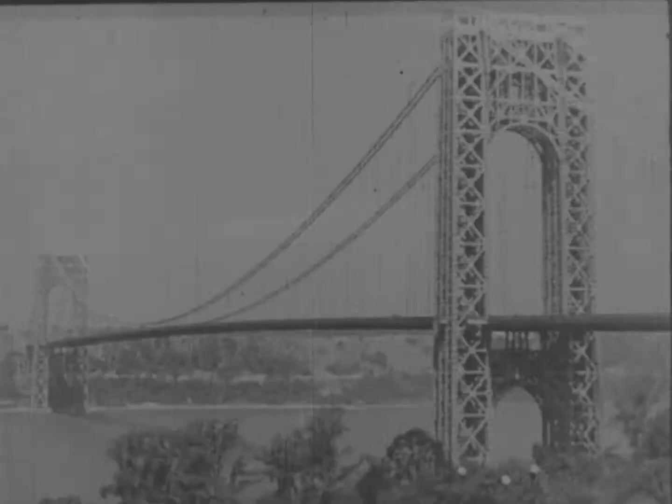New York and New Jersey created a joint agency, the Port of New York Authority. As a result of cooperation between states, a great bridge now spans the wide river, the George Washington Bridge. And beneath the river lies the Holland Tunnel, the busiest highway in the world. To date, more than 100 million cars have driven through it.

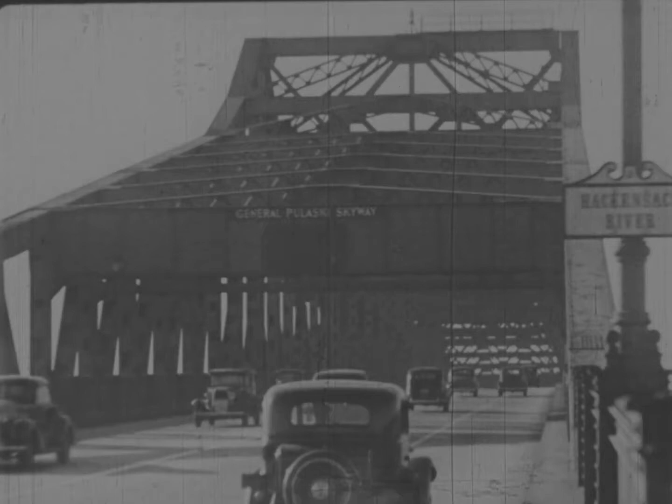Still a mounting tide of traffic seeks a river crossing. Down Manhattan's west side, over New Jersey's Skyway. A tremendous stream of passenger cars, trucks, and buses demands a fast route from shore to shore.

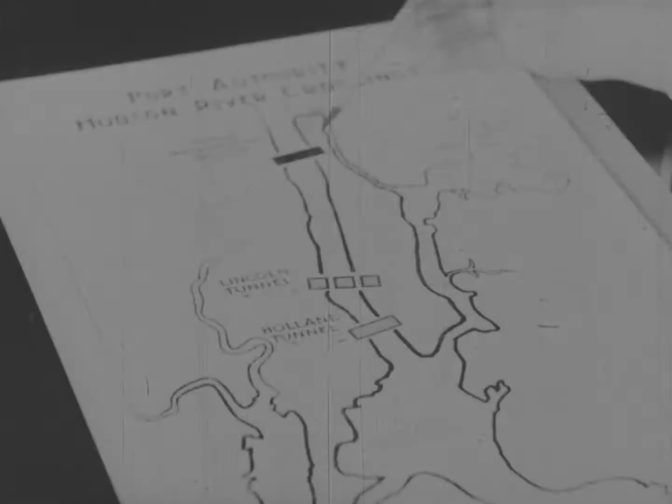Port Authority engineers study traffic trends. Facilities will soon be overcrowded. Another crossing is needed. To serve the congested Midtown area, the Lincoln Tunnel is located between the George Washington Bridge and the Holland Tunnel.

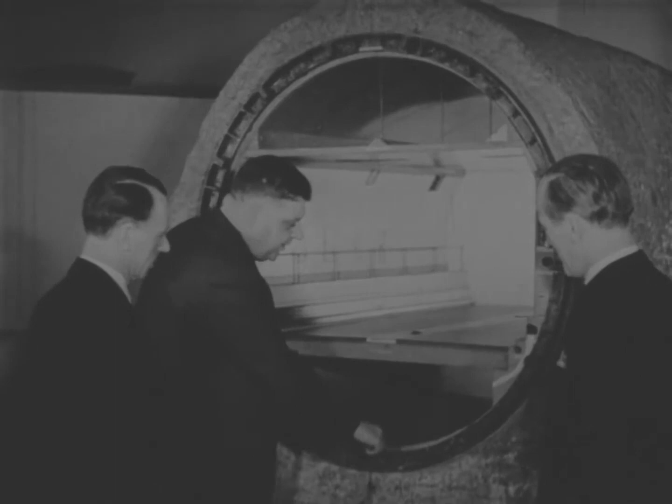To keep the river clear for shipping, it was decided to build a tunnel rather than a bridge, nearly 100 feet below the surface of the river, similar in design to the Holland Tunnel. Its outer wall is a huge cast iron pipe, 31 feet in diameter, and through it a roadway is constructed.

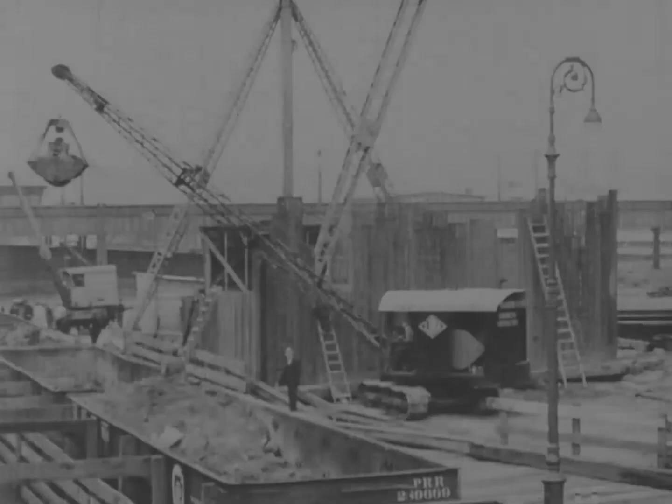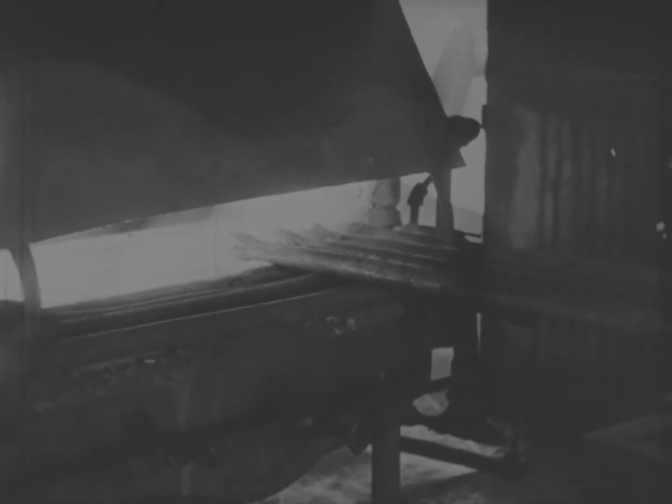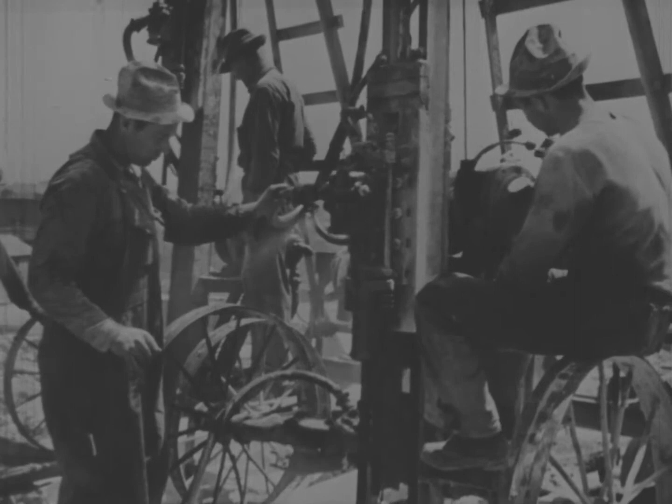And so the Lincoln Tunnel is started. Derricks and steam shovels get underway. Surveyors chart the course. Drills are forged. They must be sharp at all times, for it is necessary to drill through solid rock. Powerful air compressors are installed. To counteract the weight of water and silt, all tunneling is done in compressed air chambers.

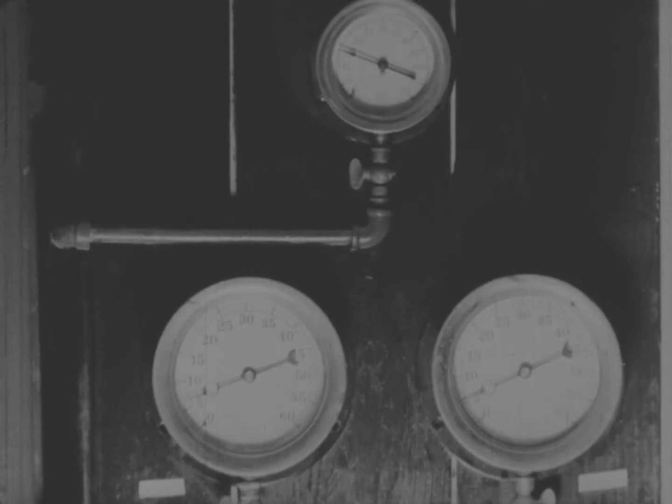He is holding his nose and blowing through his mouth to open up the passage leading from throat to ear, thereby equalizing the air pressure against his eardrums. This man, who has now passed his test, is called a sandhog and receives the compressed air worker's badge, which he will wear at all times.

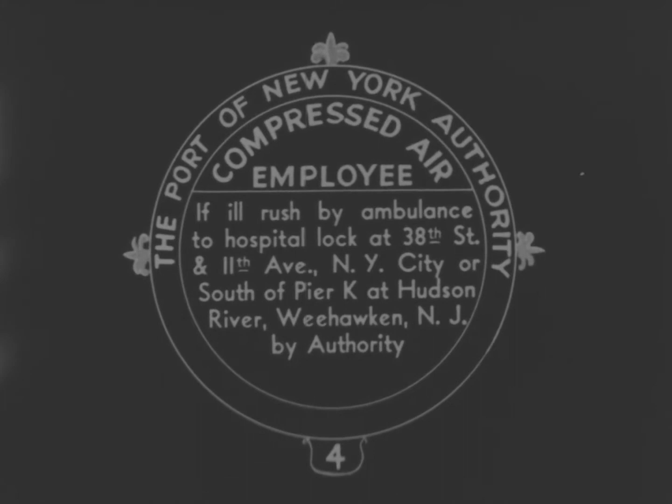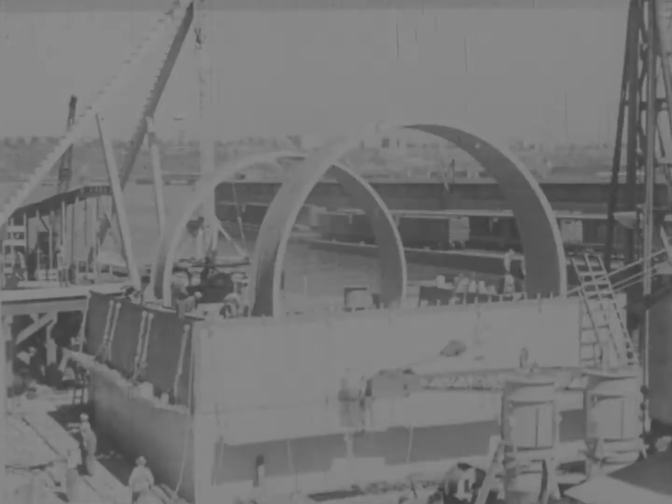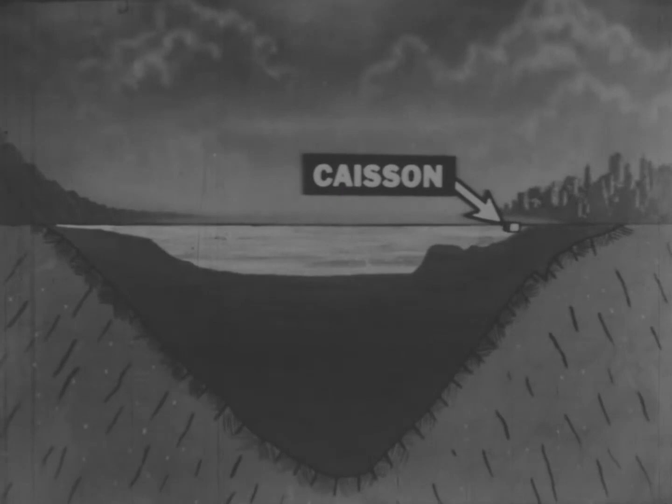A caisson, or huge steel box, has been fabricated in a shipyard, launched, towed up the river, and anchored ready for sinking. Muck is dug out until the caisson settles on bedrock to which it is sealed. The caisson is the target toward which two tunnel crews will aim.

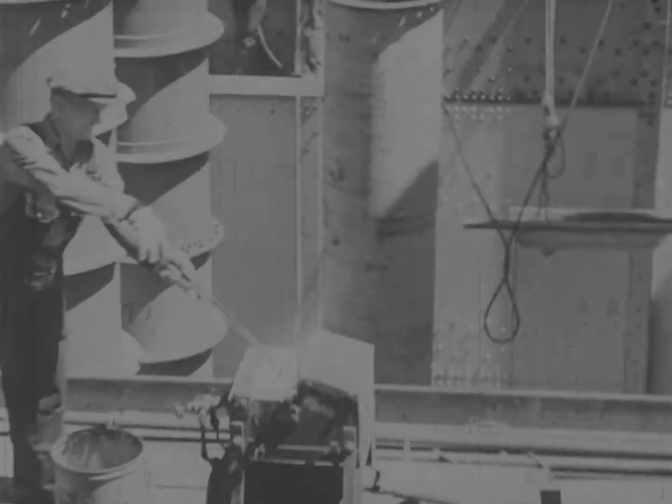As it is sunk, concrete is poured into the walls of the caisson, and its steel sides are gradually built up. The two rings at the top will be sunk to the bottom of the river and will be part of the tunnel. Meanwhile, with drill and dynamite, deep land shafts are sunk on both shores.

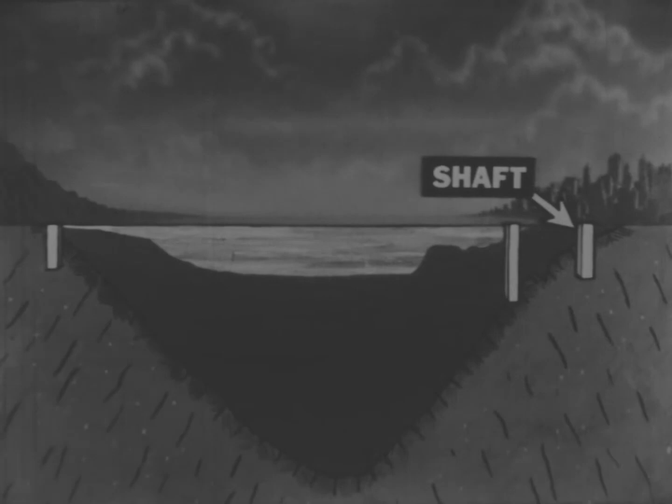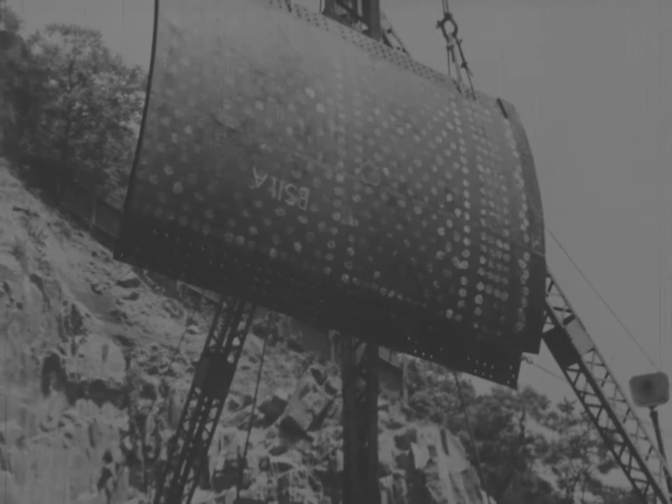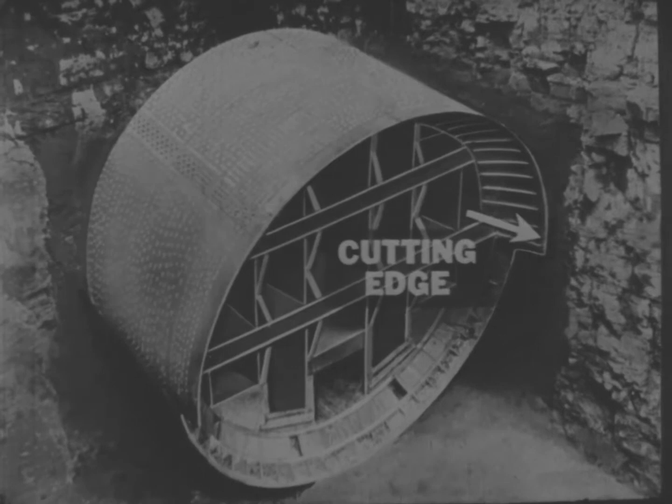At the bottom of each land shaft, a huge machine weighing about 400 tons is assembled. This is the shield, the sandhogs' work chamber during the long drive under the Hudson. At the front of the shield is a sharp cutting edge, which bores through the river bed, much as an apple corer bores through an apple.

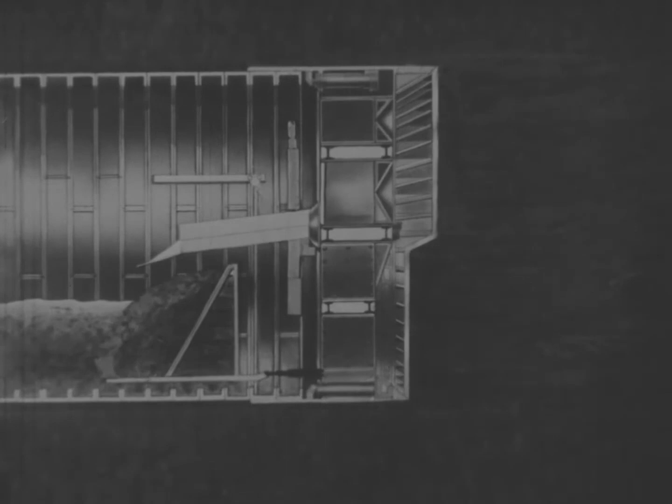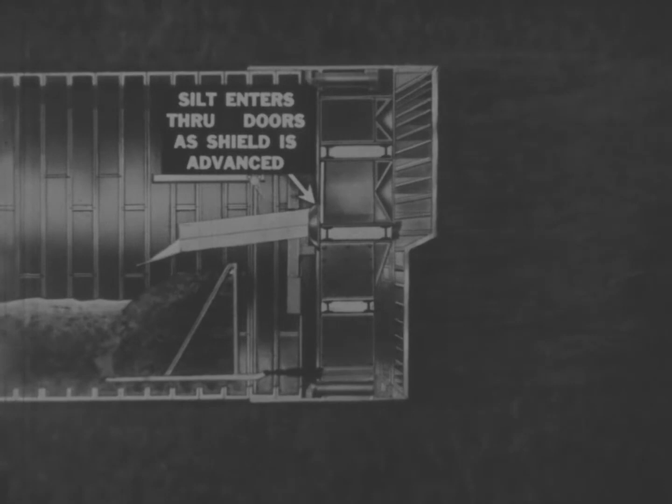The shield advances through soft mud. This mud or silt is either pushed aside or swallowed up by the shield through a mouth or opening in its face. 28 huge jacks push the massive shield forward.

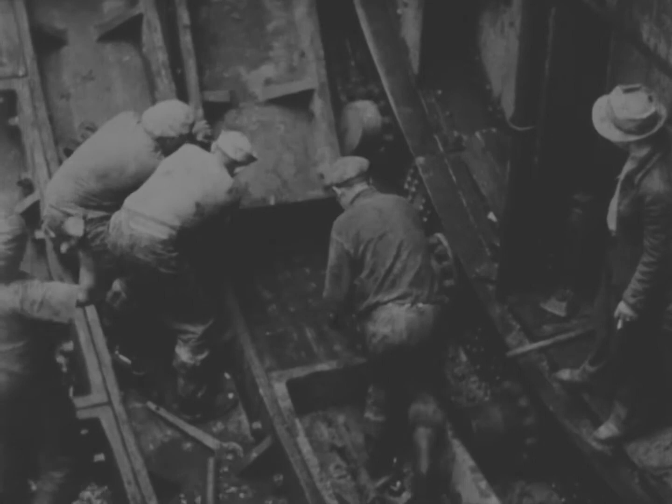The erector arm grabs the heavy segment and puts it in its proper place. The arm can be rotated and telescoped in and out. Its end grasps the heavy segment like a huge mechanical hand. Hogs give bolts a preliminary tightening, first with a hand ratchet wrench. The hydraulic bolt tightener finishes the job.

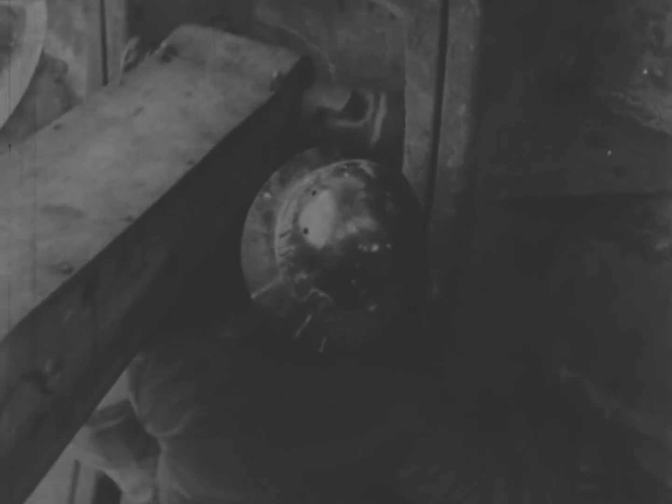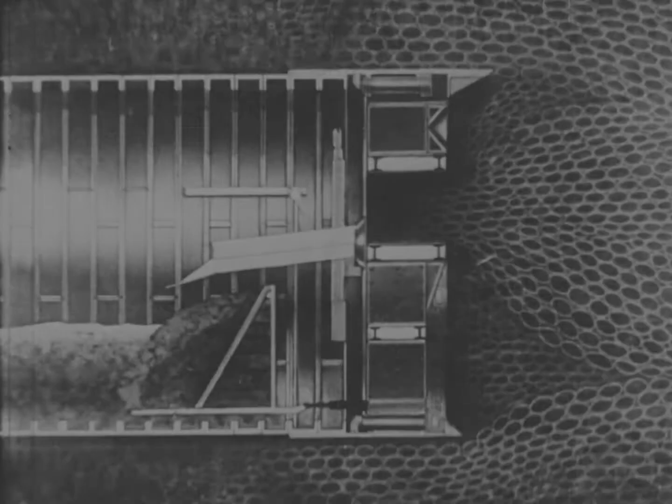In the New Jersey shield, we are heading straight toward the caisson at the rate of 40 feet a day. Because it is boring through rock, the New York shield is heading toward us at a slower rate. The tunnel ring is right up against the jacks at the back of the shield. Here goes the next shove.

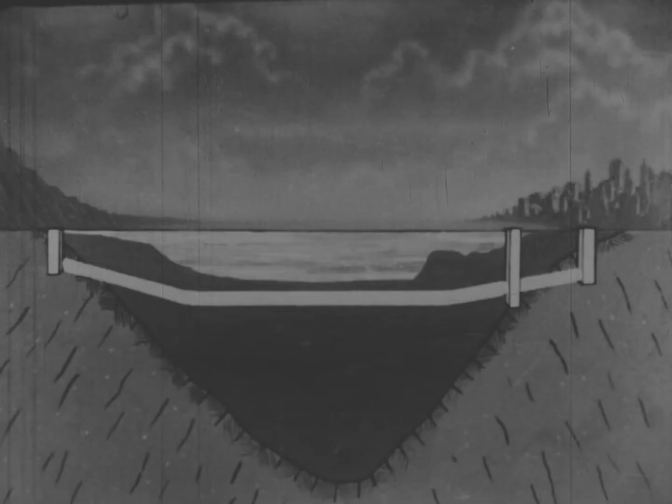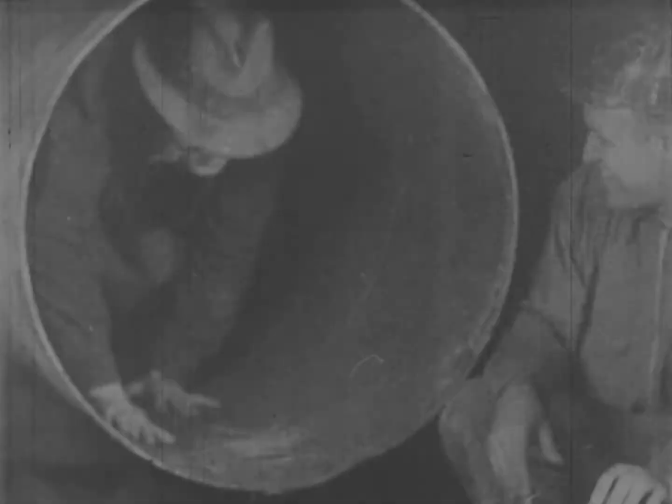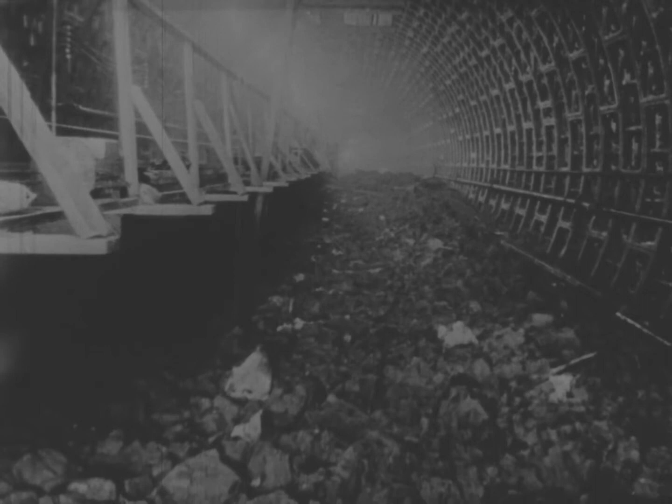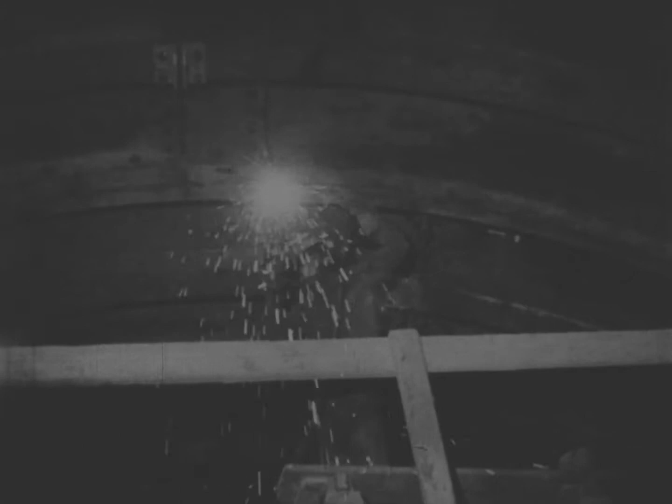The river silt left in the tunnel during construction is cleaned out. Joints are tightly caulked to make the tunnel watertight. A lining of concrete is poured into the iron tunnel. A roadway is built with an air passage above and below it.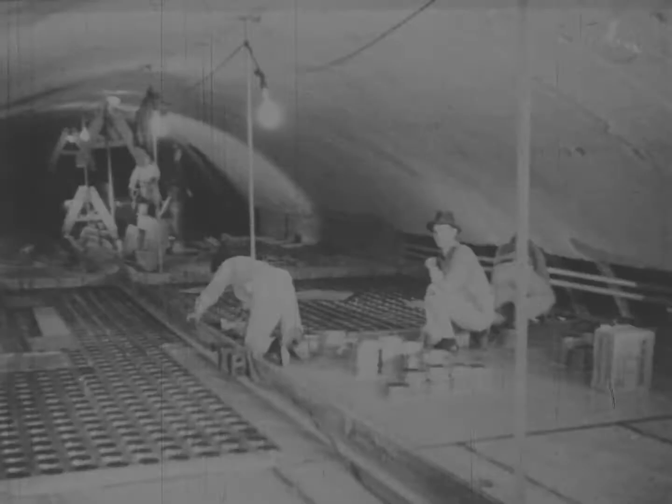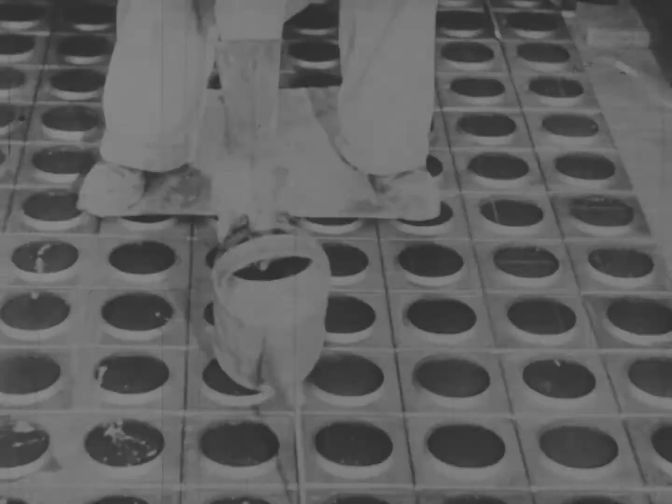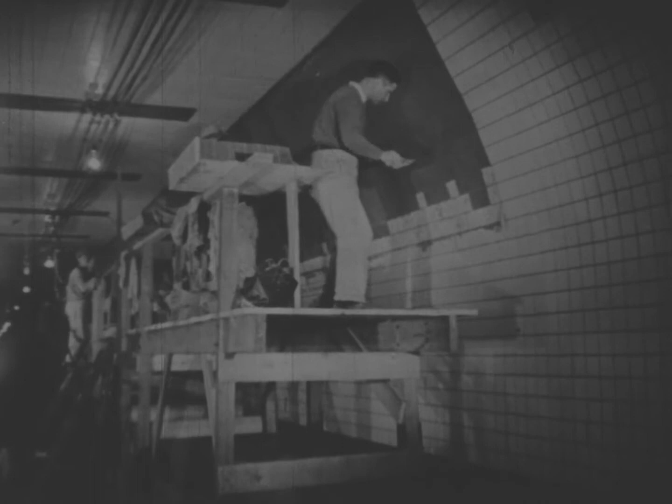Above the roadway, glass tiles are installed for the ceiling. They are placed upside down on specially prepared paper. There are nearly 1 million of these tiles in the tunnel ceiling. When the tiles are set, the paper is removed. Miles of gleaming white wall tile brighten the tunnel interior. The wall tile is ceramic.

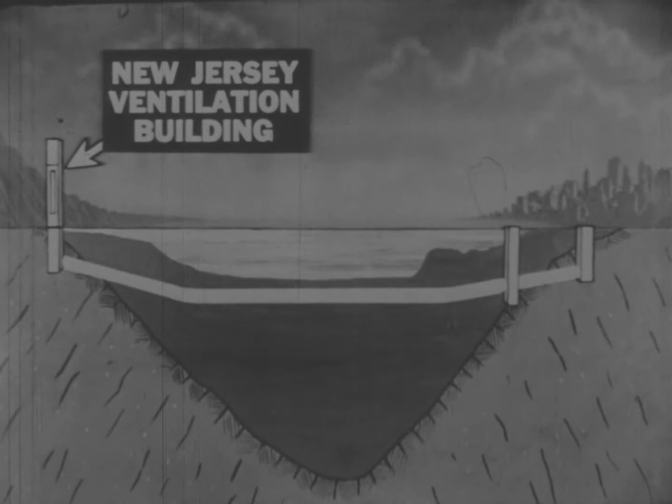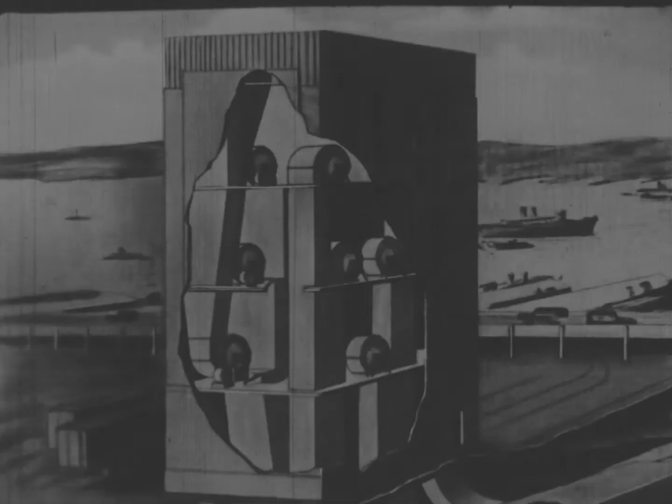Ventilation is an important safety feature of the Lincoln Tunnel. In these buildings are housed fans and other equipment to keep the tunnel air pure and healthy and eliminate dangerous carbon monoxide gas from automobile exhaust. Huge blower fans supply fresh air, while exhaust fans suck vitiated air out of the tunnel.

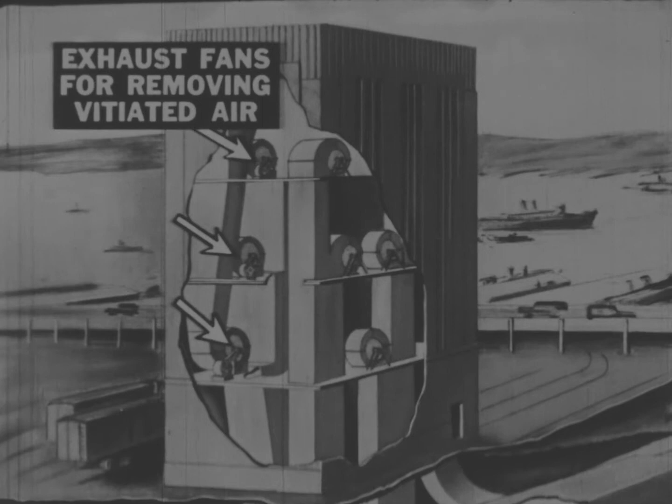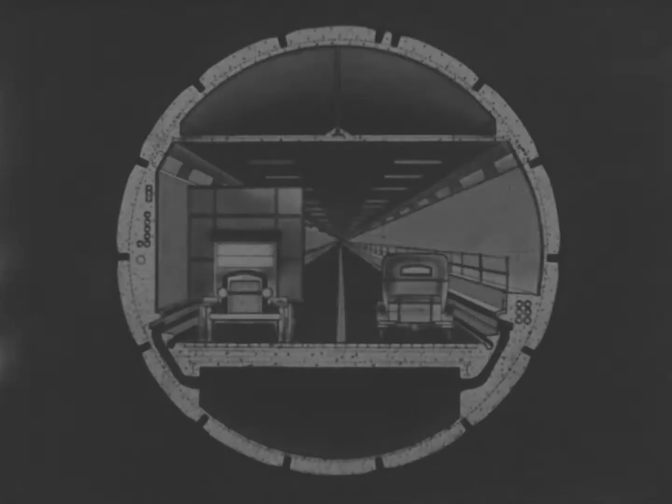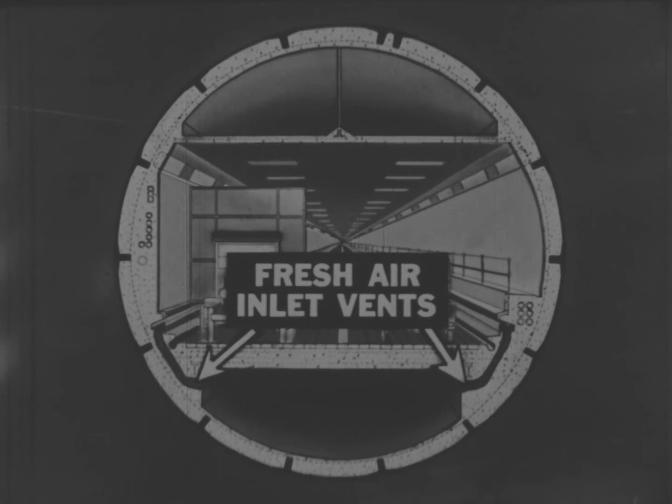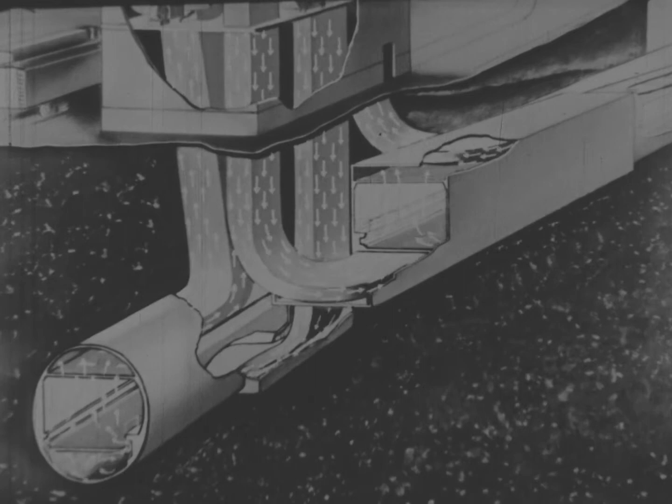An air duct carries fresh air down from the towers to the tunnel. Vents in the curb admit air to the roadway. The air of the tunnel can be completely renewed every minute and a half. Fresh air is blown in under the roadway and rises gently. It is mixed with the gases exhausted by automobiles. This air and gas mixture is sucked through openings in the ceiling into an upper duct and drawn out.

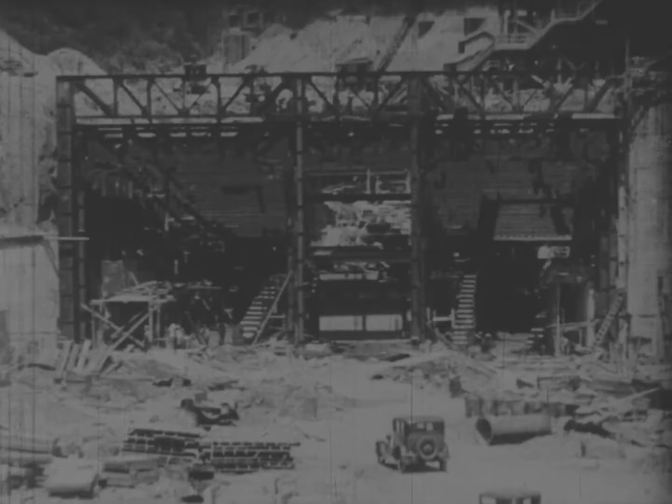In Weehawken, New Jersey, a great canyon was gouged out of rocky cliffs to provide approach connections, linking the tunnel with all the major highways of the area.

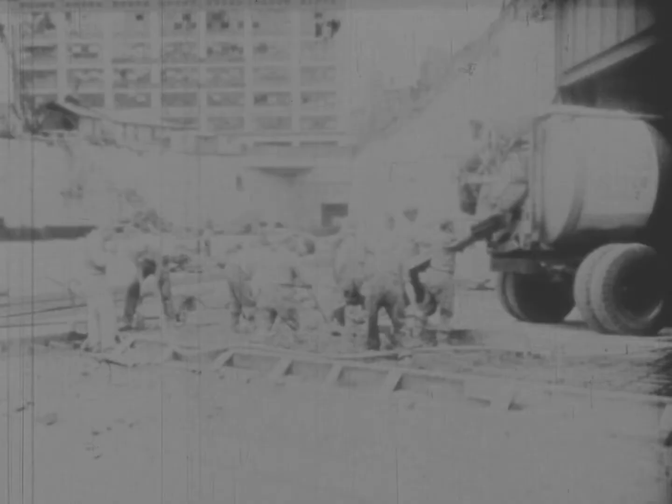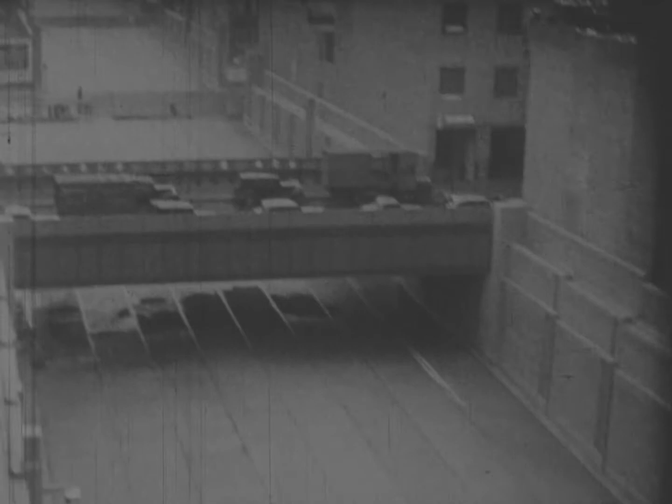While in Manhattan, a plaza and a new North and South Avenue between 9th and 10th Avenues provide connections with 6 crosstown streets from 34th to 42nd Street and give quick access to and from the tunnel in all directions.